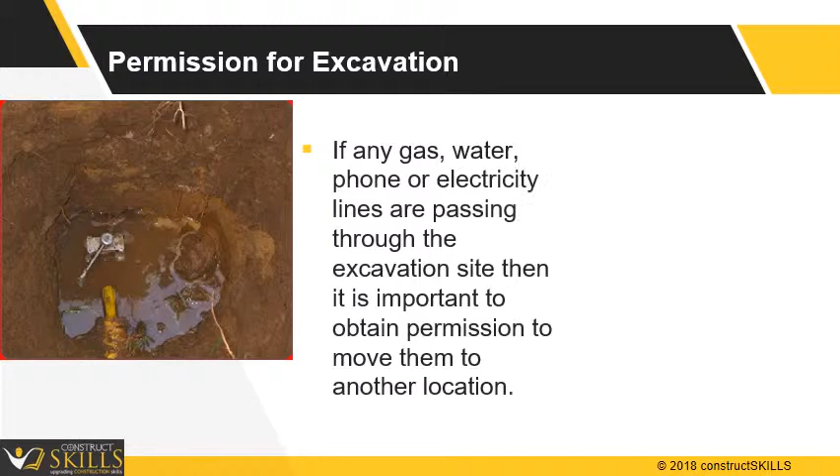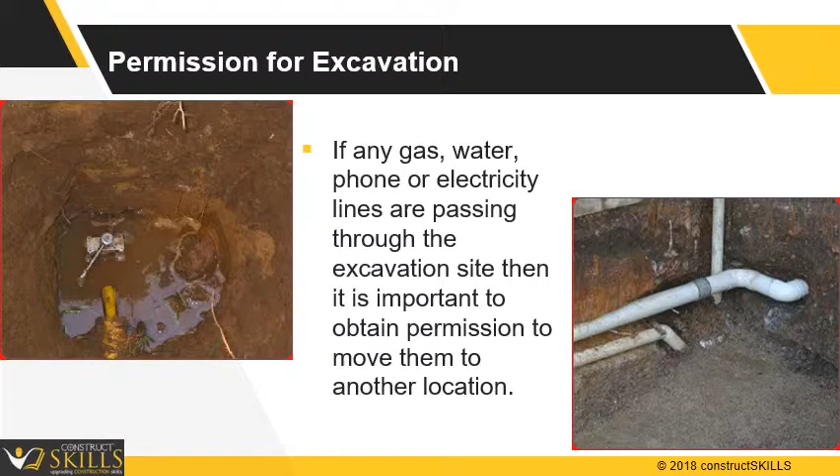In this lecture, we will discuss various permissions and precautions to be taken before excavation work begins on a project site. Utility lines such as gas, water, phone, or electricity lines are likely to interfere with excavation work. Examine the site for physical evidence such as manholes and pole risers, which indicates existence of utilities. Ensure all utilities are shut off or disconnected before excavation activity begins.

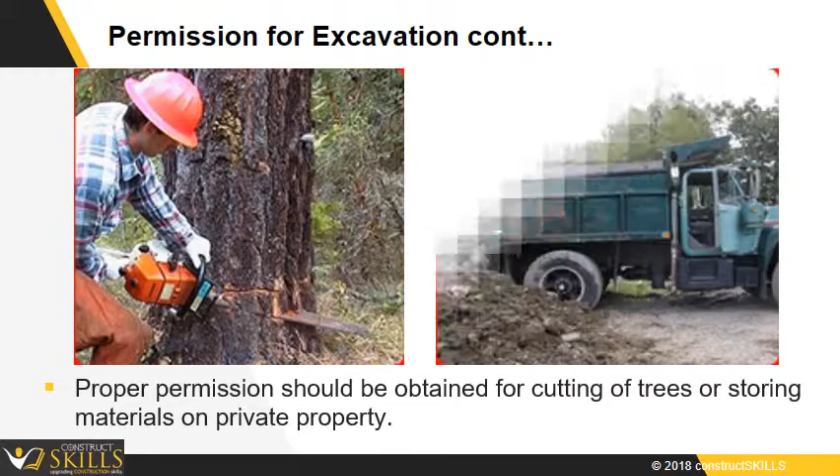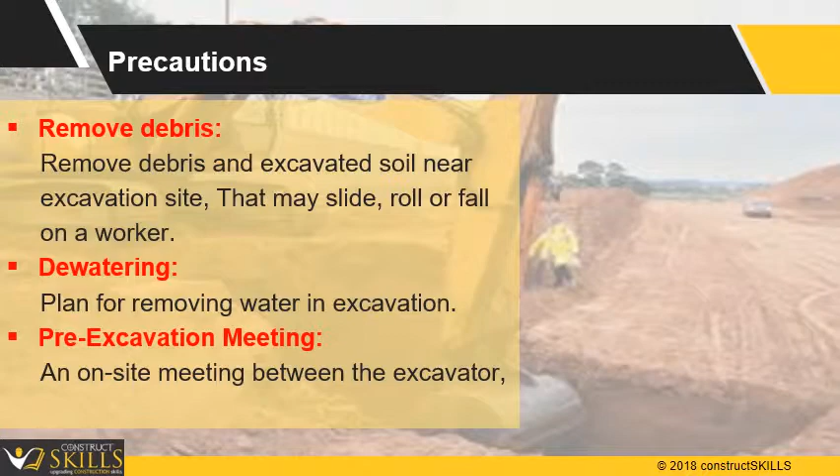Proper permission should be obtained for cutting of trees, which might involve local government authorities, and storing material on private property. Major precautions to be taken before undertaking excavation work are: remove debris and excavated soil near the excavation site that may slide, roll or fall on a worker. Ensure adequate planning for removal of underground water is performed for areas with high water tables. Preferably, an on-site pre-excavation meeting between the excavator, contractor and facility owners is recommended.

Soil quality. Check soil strength and stability to ensure sloping and shoring requirements. Visually inspect the type and characteristics of soil. Soil should be cohesive, so that it sticks together and there are lesser chances of cave-in. Exit plan. Determine how workers will enter and exit the excavation pit. At a minimum, a ladder should be provided every 8 meters or 25 feet.

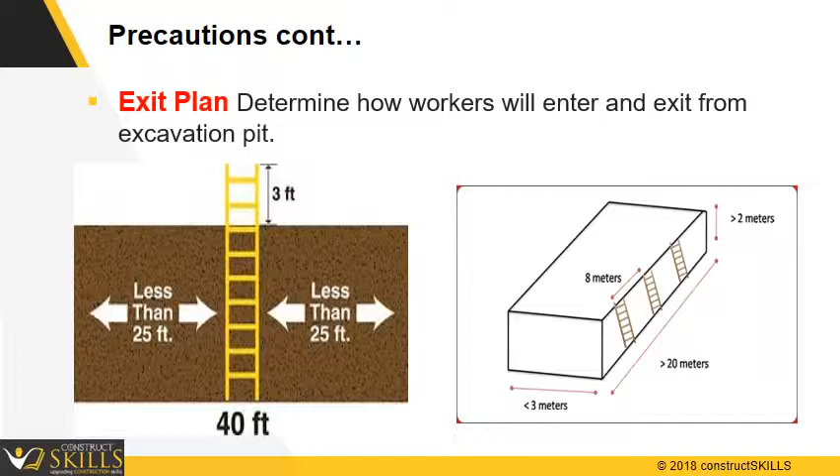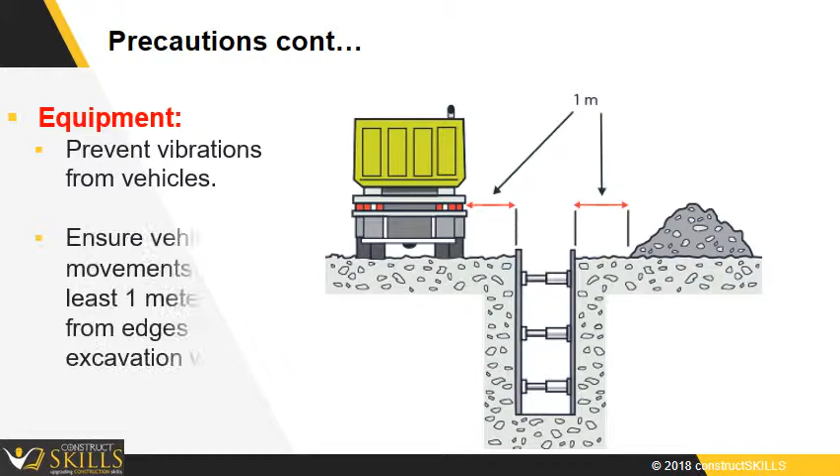Vehicles or construction equipment cause vibrations, which could make the site of excavation collapse. Ensure vehicle movements are at least 1 meter away from edges of excavation walls. Tests for low oxygen, hazardous fumes and toxic gases such as methane or carbon monoxide should be done. Provide means of fresh air entry by blowers or fans.

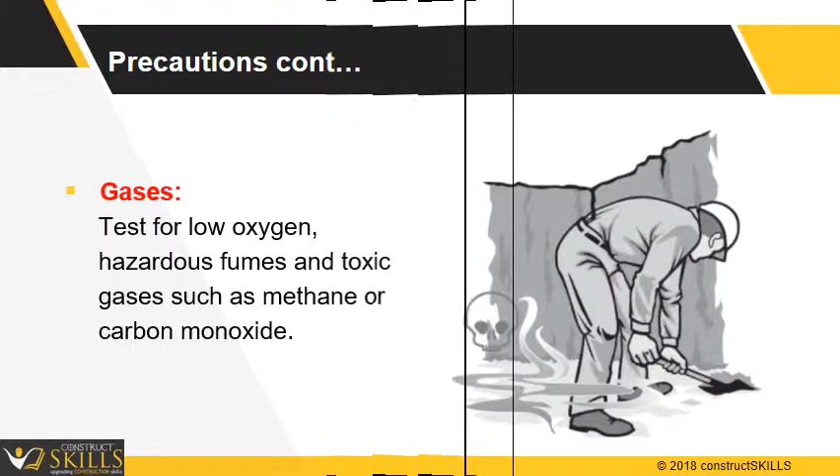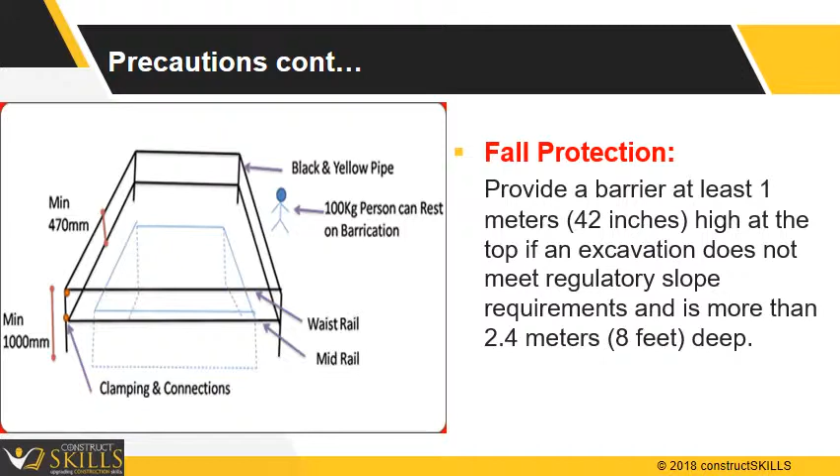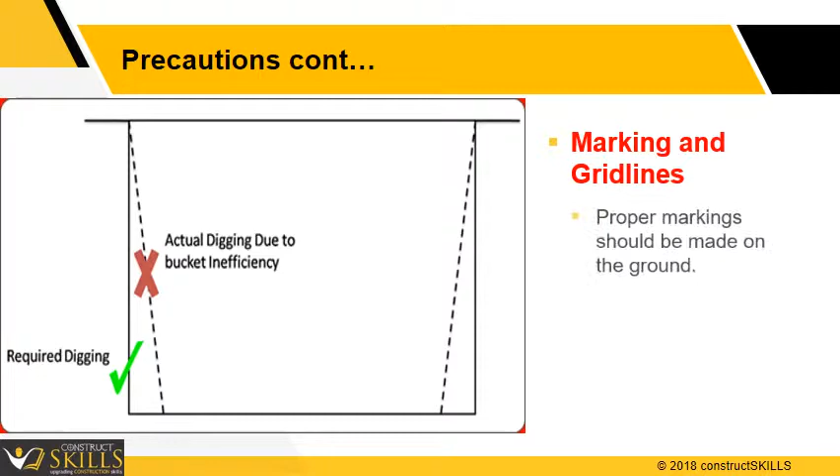Fall protection. Provide a guardrail at least 1 meter, 42 inches, high. There should also be a midrail about 470 millimeters below the top rail. Ensure rails are firmly inserted in the ground. Before excavation begins, proper markings should be made on the ground. All markings should be 2-inch wide strips, preferably white in color, for better visibility. The markings should consider working space needed for labor to work inside the pits. Preferably, there should be a minimum of 150 millimeters of space between RCC surfaces such as foundations or pipes and pit walls.

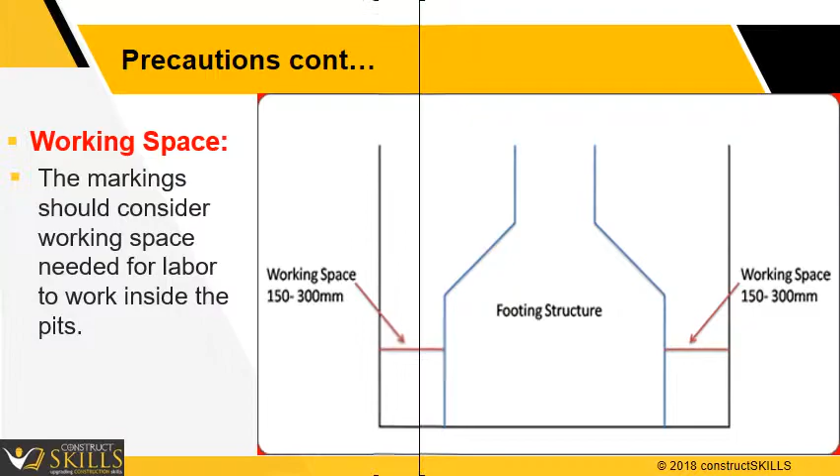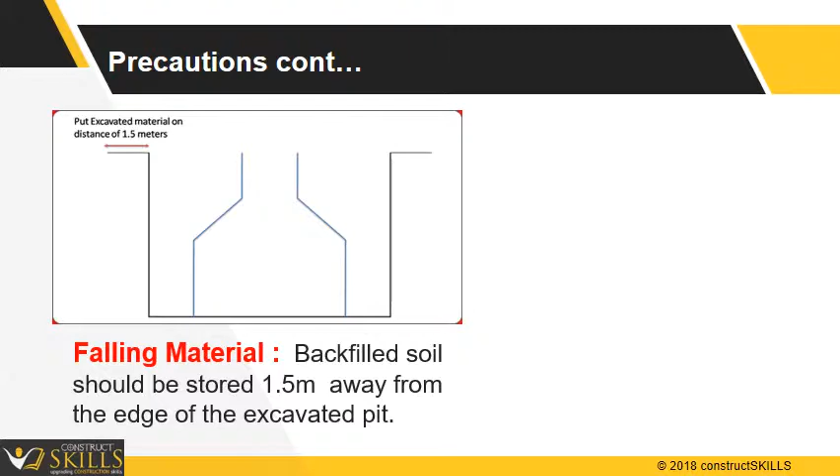Falling material. Backfill soil should be stored at least 1.5 meters away from the edge of the excavated pit, so that its weight does not exert pressure on the pit edges. We should also prevent loose heap material falling back into pits. For any construction work of a building, black cotton soil should be removed. A minimum of 600 millimeters gap between pit and railing should be provided. Overall, prevent danger to workers in or near excavations. A competent person must inspect excavation barricading and entry-exit plans every day. No work should take place until the excavation is safe.